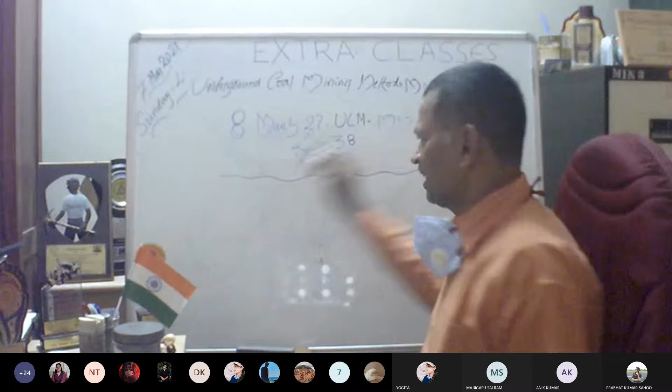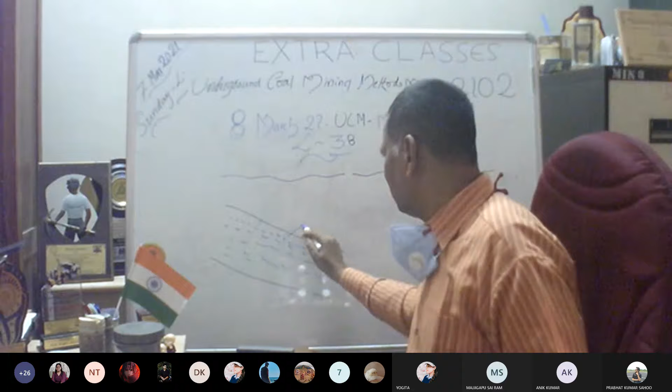2102, 38th lecture. Now, whenever there are thick seams, just consider this is your surface, and then the depth. So if the seam is disposed as a very thick seam, I can extract it in different slices. The slices can be inclined along the dip direction like this, and then this is called... any problem?

Are you able to see the board? No, sir, not exactly. Ajay, you are able to hear my voice? Yes, sir. If you are not able to see the board properly, there is some problem in focusing, I can adjust it. Now let me do that.

Now tell me whether there is improvement in the focus or decreasing. I am rotating in one direction. You say yes if it is increasing clarity. Is it increasing or decreasing? No, sir. So now I am rotating in the opposite direction. Yogita madam, is it improving the clarity on the board, or deteriorating? I am focusing it. Are you able to see better?

Better now? No, sir. No, what is the meaning of no? You should continue to tell me whether the focus is decreasing. Decreasing, right? Now I am rotating in the opposite direction. Now improving? Yes, sir. Very good. Now perfect? You tell me. Yes, sir. Is it okay now? Yes, sir. It is okay? Very good. That's what I want to know.

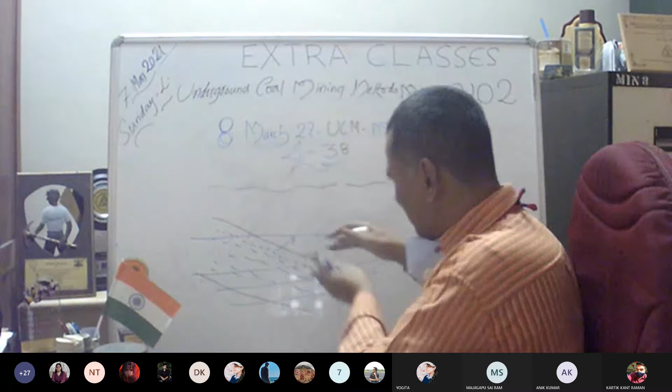Right. And then one more thing is transverse. There are so many ways. Instead of slicing like this, it can be in other fashion. And that is the reason why they have given diagonal, transverse, inclined, horizontal slicing, something like that. So it is very simple to understand. Of course, it is there in the books that I want to explain.

And here, one more thing is when it comes to our special methods of mining, especially for the thick seam or other seams. Already we have seen, I don't want to repeat again, blasting gallery method and wide stall method. Have you understood the wide stall method? Yes, no. Wide stall. So this is slicing.

This can be in different ways, descending, ascending. Other things I will be showing you in the slide and we will discuss. That's what I want to show here. This can be horizontal, inclined, ascending, descending order. And this can be inclined or horizontal, diagonal, transverse. This is the way the terminology is given.

And when it comes to special methods, you have to tell yes or no, then I will continue further. Already the blasting gallery method I have shown with many case studies, photographs, everything. Then we go to wide stall mining, where suppose this is a seam, this is a gallery and this is a pillar. The first thing is, this wide stall method is a partial extraction method, that you should note down.

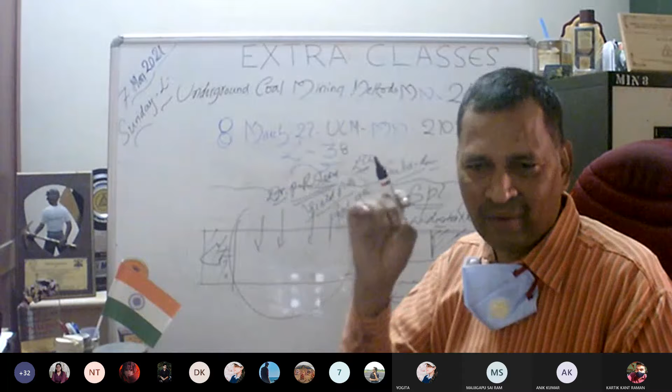Dr. P.R. Sheorey. He has made excellent efforts. He was our former colleague scientist in CMRI, with the yield pillar technique, or goaf pillar method. So these are different. This can be of a chessboard and so many terminologies you can see, right? This was experimented even in some ECL mines. Of course, later, just like our blasting gallery panels, there were some problems and it stopped. But these are the requirements of designing new methods of mining indigenously developed based on our Indian geomining conditions without importing any other technologies.

So this is your Atmanirbhar Bharat or Make in India, Startup, Stand Up India, here in our National Education Policy 2020. So here what is done? We leave a small rib, and its size we will estimate based on what will be the safety factor with some type of rock mechanics analysis. There is modeling and so many approaches for that. Those things we will discuss later.

So I am leaving this in the goaf so that instead of all this falling all of a sudden giving dynamic load, we are trying to provide a goaf pillar or small rib of such a size that it has a safety factor less than 1 or around 1, so that after some time it should yield. That is why it is called goaf pillar or yield pillar method, so that if it is strong, all of a sudden it will not fall, and there is a pillar given in the goaf.

If this is the total goaf area, I am leaving something in between. So before falling, it will not fall all of a sudden; whatever is left out will yield, and this is designed so that its safety factor is around 1 or less than 1. This is the way we decide and design. These are some of the special methods, and another method I have told you about many times is hydraulic mining. You heard about hydraulic mining?

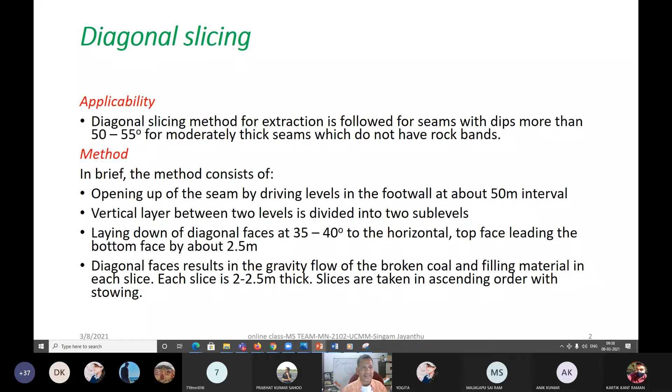Now, diagonal slicing method for extraction - let me tell you, this is more easy, right? With dips more than 50 to 55 degrees for moderately thick seams which do not have rock bands, we used to follow this method, and then the method is simple.

This involves opening of a seam by driving levels in the footwall at about 50 meter interval. The vertical layer between two levels is divided into sub-levels, and then we lay down diagonal faces at 35 to 40 degrees to the horizontal. This is the way it's done.

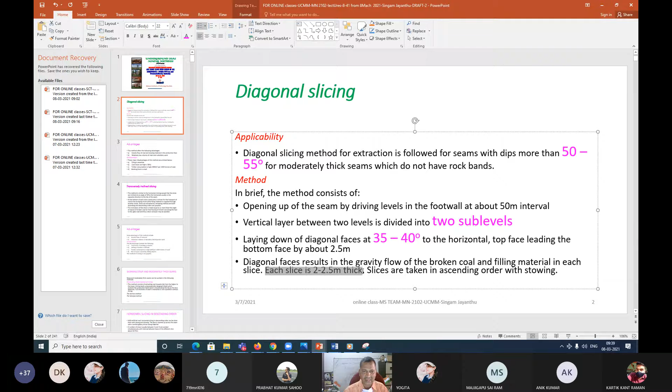Diagonal faces result in gravity flow of the broken coal and filling material in each slice. The slice thickness can be 2 to 2.5 meters - that is what was followed before, that's why it's kept here. We give more importance to recent technology, that's why I want to give only some information about these.

Now slices are taken in ascending order when it is with stowing - you already understand this, I need not explain further. When it is with caving, slices are taken in the descending order.

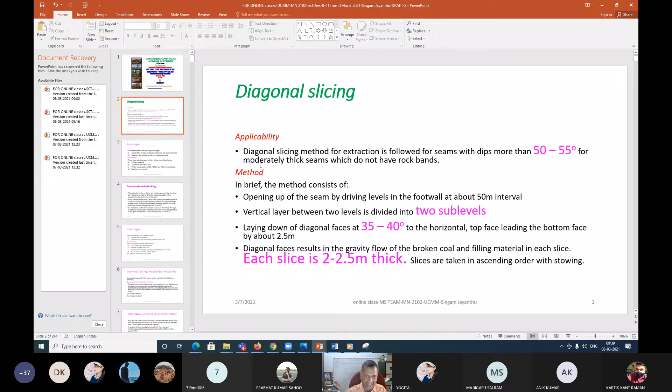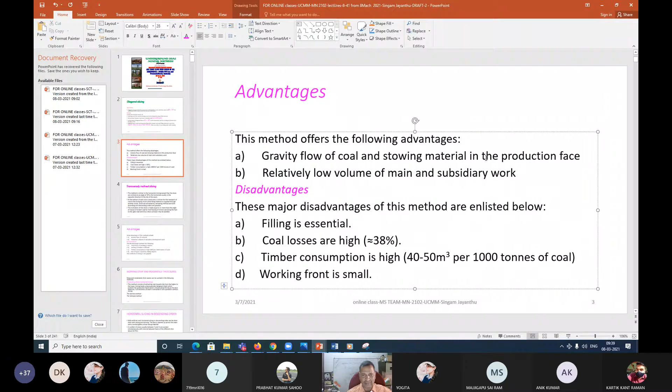Then what are the advantages of this? I'm spending less time on this, my beloved students, because it is easy to understand by anybody. There is gravity flow of coal and stowing material in the production face because it is dipping diagonally, not horizontal. Then there's relatively low volume of main and subsidiary works.

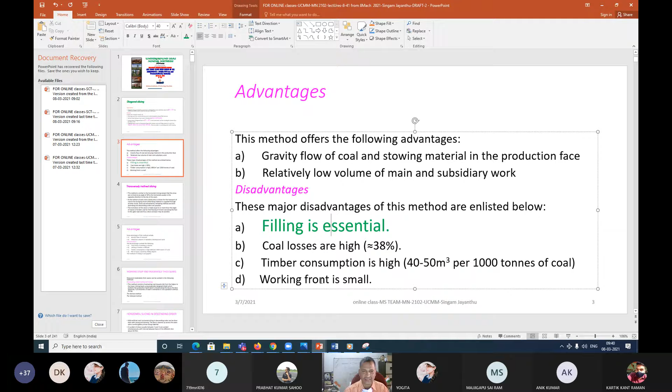The major disadvantages of this method are: filling is essential because we are going with ascending order. Nowadays we don't go with sand, which is scarce material, but some type of pond ash or crushed stone - our Singareni colliery, you may note, uses crushed stone from overburden material for backfilling purposes. Then coal losses are very high, timber consumption is high, and the working front is small based on the face length.

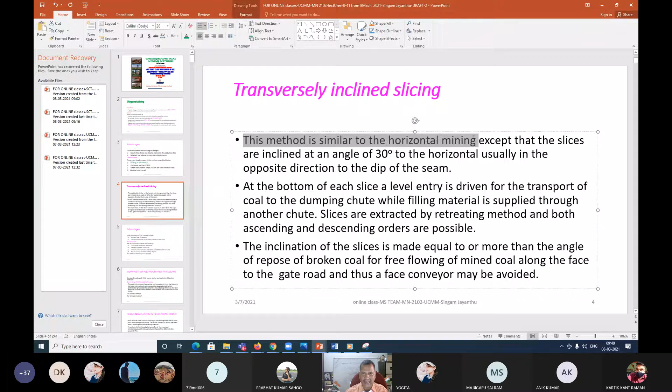Then transversely inclined slicing - now try to understand, this is something like a horizontal slicing, right?

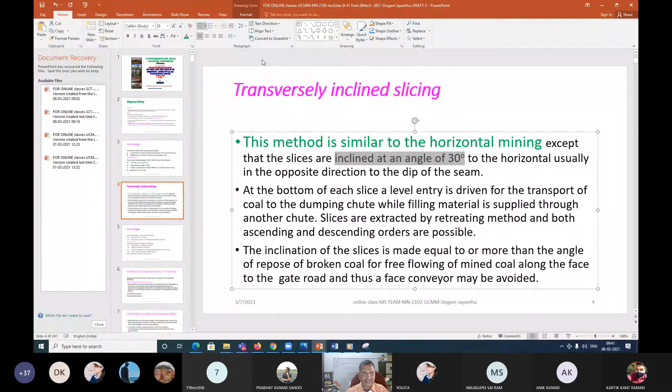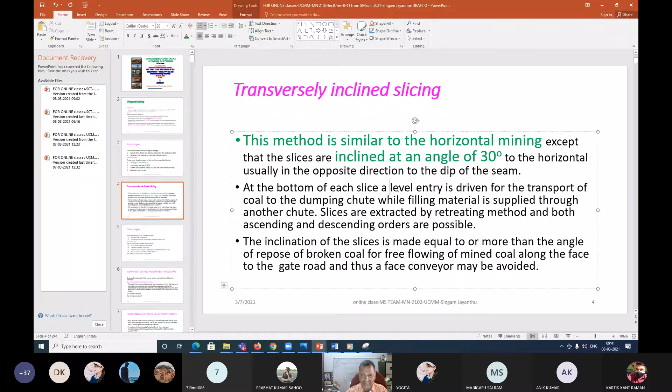Horizontal mining, except the slices are inclined at an angle of around 30 degrees to the horizontal, usually in the opposite direction to the dip of the seam. At the bottom of each slice, a level entry is driven, and for coal transport to the dumping chute, they prepare something like a bunker. That dumping chute is something like a bunker, under which there is an opening through which the coal will fall. That's what a chute means.

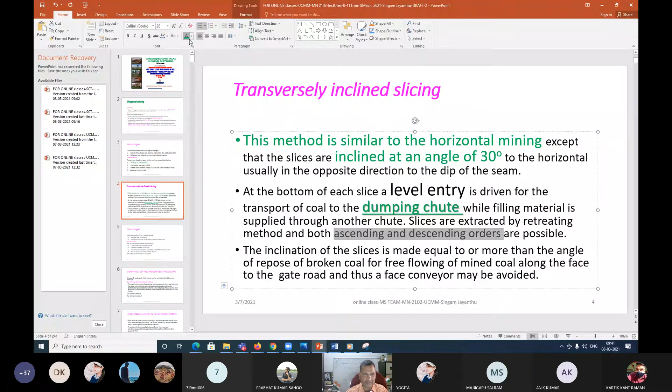While filling material is supplied through another chute, slices are extracted by the retreating method, and both ascending and descending are possible. The inclination of the slice is made equal to or more than the angle of repose of the broken coal. This is a very important point here.

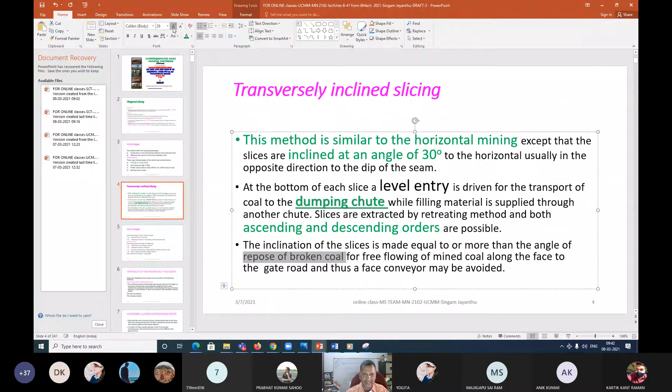Angle of repose, why is it required? Because the material has to pass through when it is sent down, that's the main issue. The main advantage of this is gravity flow of the material. The total front of working is shorter, and setting of timber is difficult - because when you are ascending, there is sand on the floor and you are working over that. So these are some of the issues, plus risk of injury caused by sliding objects.

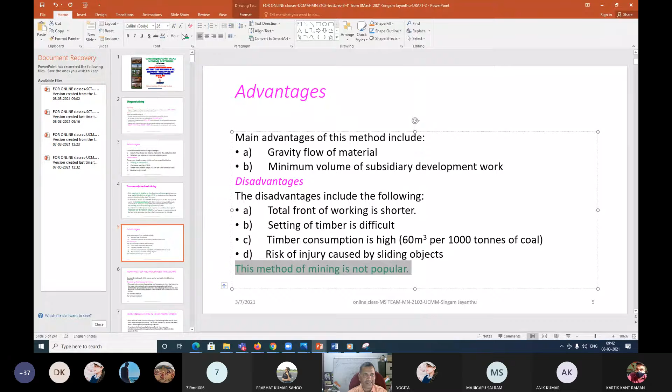That's why I'm not giving much importance to this, since these are not very popular methods, right? That is a very important point. So we go to so many important issues of methods.

Like in our northeastern coal fields, they are very highly inclined and highly disturbed seams. Dr. T.N. Singh Saab has done excellent work at that time in the 1980s, 90s, when we were there. Later, almost very little work was done in designing new methods or importing other technologies. But the descending shield method is one of that.

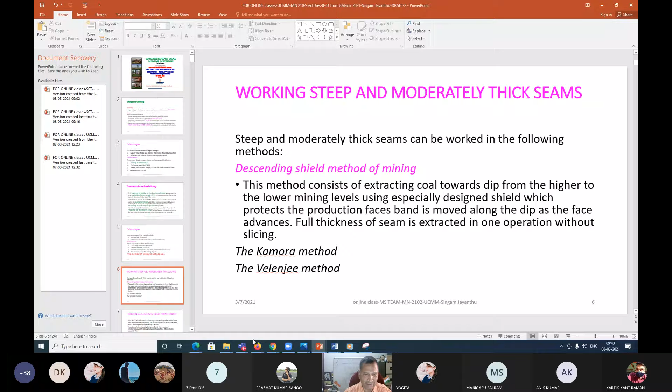Here you try to understand, it's very simple. What happens here is - I am just now coming out of this slide share, so I will draw how it appears. That's more important to understand.

I hope you people are ready with your presentations, whatever are there.

Now I am stopping sharing to explain using the slide share. Now you are able to see this whiteboard, yes?

In this, very simply, this is for highly inclined seams. When it comes to descending shield, you just try to understand. I am showing a section like this - you will be seeing this in so many books, already I have given you those references. So if this is a seam, it is inclined something like this.

Now here, what you are doing - this is something like a descending shield, some type of arrangement where there is cutting. You can cut it or blast these materials. Even your person - this is a shield, there is a cover like this, under which these persons are standing. Before you cut this, you make some connection. It appears something like a metal mine method, but here there is a level along this.

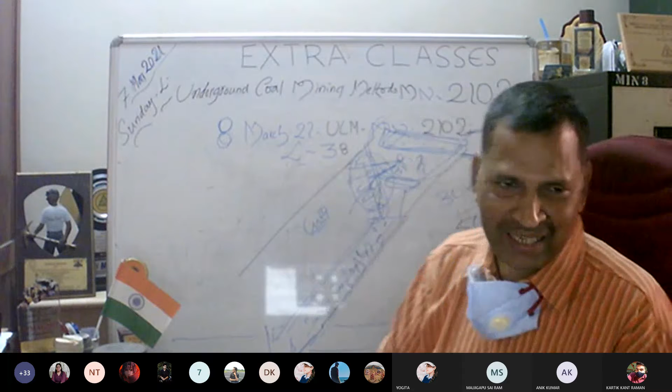This is horizontal horizon mining, also called horizon mining, where you are developing something like a metal mine. The shield descends with persons working under a canopy. That's why it is called the descending shield method. Very simple - when you understand the logic and concept, it becomes easy. If you have any doubts, we'll discuss further.

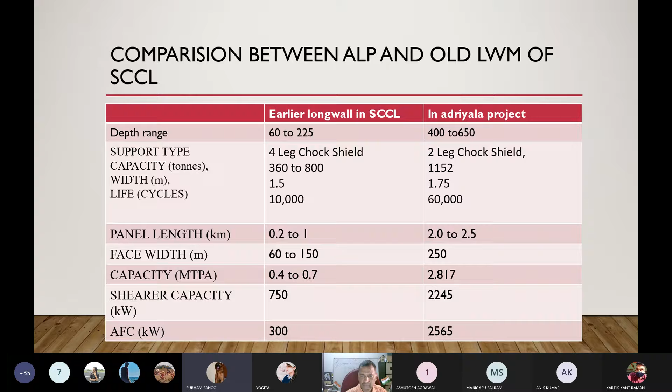So longwall mining is a mining method in which very long rectangular blocks of coal are defined during the development stage of the mine, and then extracted in a single continuous operation by an automated cutting head moving parallel to the coal face. That automated cutting head is known as the shearer. When the coal is cut, the working area is protected by a movable powered roof support system. Sir, these are the hydraulic jacks which support the roof. So the workers at the mine site get a very safe environment compared to other methods of underground coal mining. Next slide, please.

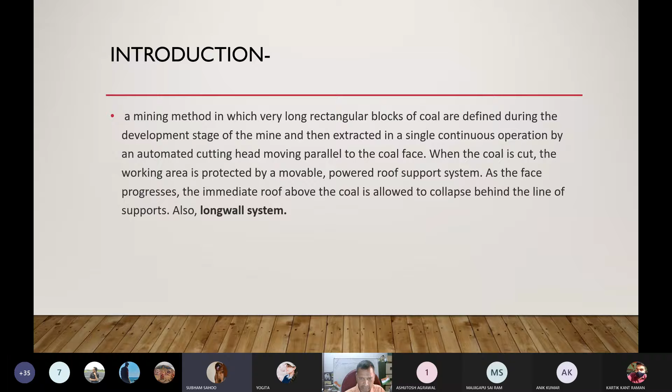So the basic idea of longwall mining was developed in England in the 17th century. Miners undercut the coal along the width of the coal face, removing coal as it fell on the conveyor belt. This was known as the Shropshire method of mining. While the technology has changed considerably, the basic idea remains the same: to remove essentially all the coal from the broad face and allow the roof and overlying rock to collapse into the void behind. Next slide, please.

So at present, due to technology, here are the equipments. A number of hydraulic jacks called powered roof supports. These are the jacks; in the next slide I will show you the picture. These jacks give support to the roof. It holds the roof, and under that the workers with the cutting machine work and extract the coal. These shields are typically 1.75 meter wide and placed in a long line side by side up to 400 meter in length. An individual chock can weigh 30 to 40 tons, extend to a maximum cutting height of up to 6 meter, and have a yield rating of 1000 to 1250 tons each. Next slide, please.

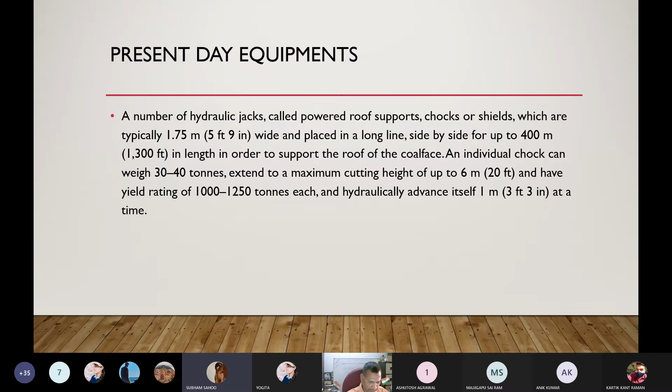Sir, here I have also done a comparison with the room and pillar method. Longwall and room and pillar can both be used for mining, but longwall has better resource recovery, about 80%, compared to about 60% for room and pillar. Next slide, please.

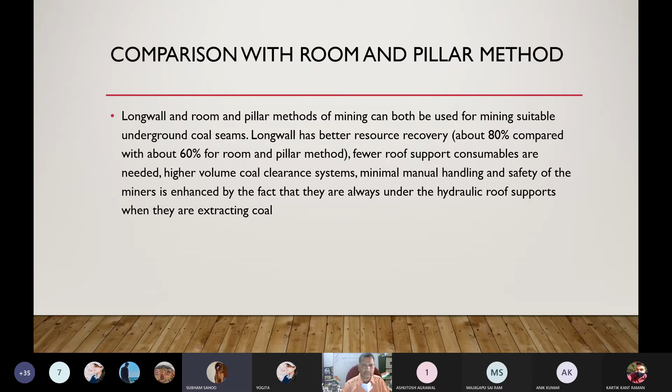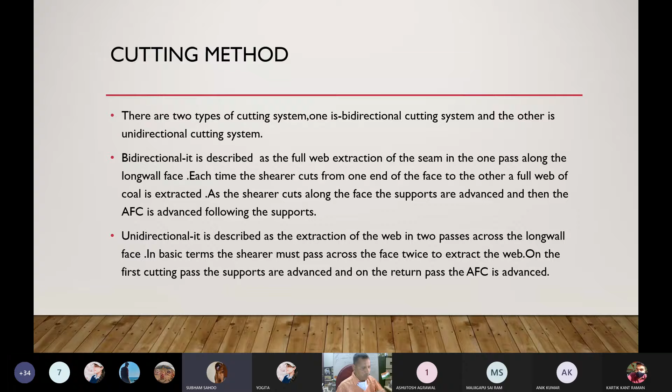So there are mainly two types of cutting system. One is the bidirectional cutting system and the other is the unidirectional cutting system. The bidirectional cutting system is described as full web extraction of the seam in one pass only, while the unidirectional cutting system is described as extraction of the web in two passes across the longwall face. Next slide, please.

So here, casually, I can say the overview of this method is: in this method, generally a relatively long mining face is there, which is up to 100 to 300 meters long. So the shearer will cut the coal, okay, and the conveyor belt will drive it away out of the site.

Once the longwall face equipment has been installed, coal can be extracted along the full length of the face in slices. Means slice by slice, we will move forward and cut the coal face. This process is repeated continuously, thus completely removing a rectangular block of coal, the length of the block depending on a number of factors. Next slide, please.

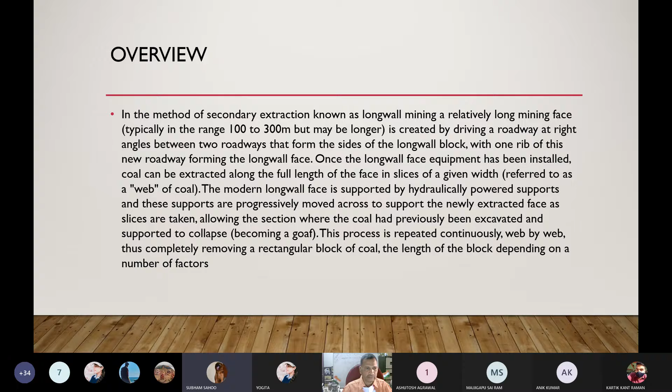Longwall mining actually is done in two procedures. One is advancing and another is retreating. In the advancing method, the start point is very close to the main. Go to the figures. If you have any figures, go to that. Within 1 minute, you have to finish. Go to figures. Leave the text. Okay, sir. Go to figures if you have any.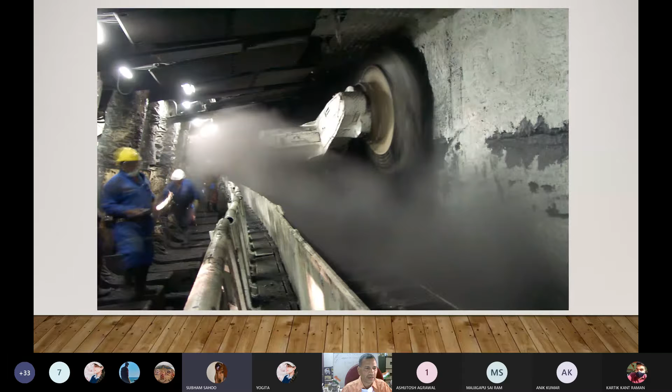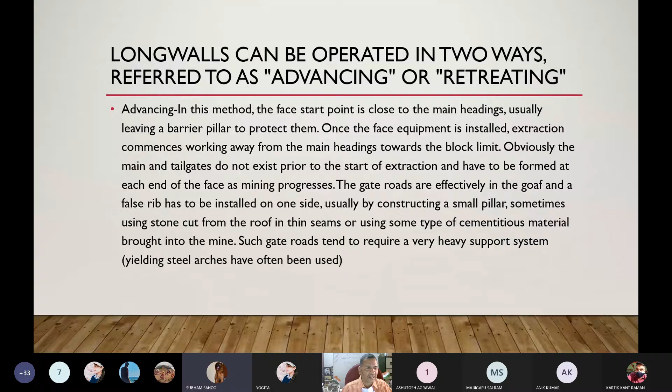Sir, in the second slide. Go to the third. Not these two figures. Four. If you are explaining the fourth method, you should show the figure of that. Otherwise, there is no point in showing this. Fourth slide. Now you conclude. Conclude. And others should say what are the blunders made in this, what improvements can be done. Others should tell now. And now you conclude.

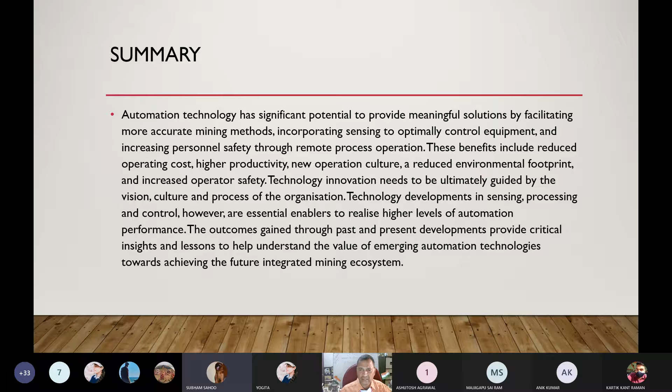So definitely we need to develop our technology, and the best solution of this is the longwall mining method only, as it gives 80% efficiency and better safety results to the workers of the mining sites. Longwall mining is the future of underground coal mining in India. Thank you. Now others should say if any questions to him.

I hope at least after this many presentations and this much time, this almost last week, you must have understood the logic and the essence of this. The question is what mistakes were made by him and how to improve it.

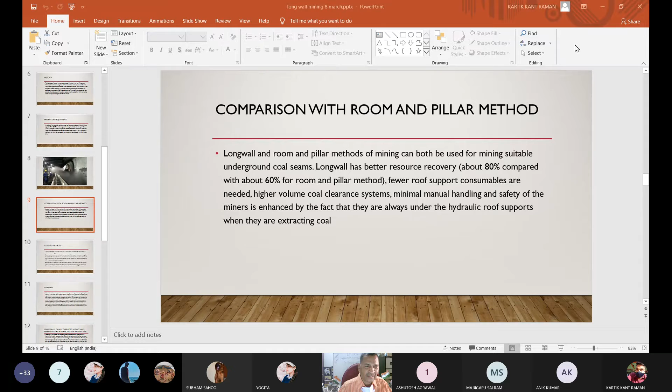Already I told you, I don't know to you people or not. It is something like somebody is eating chicken, you are taking it from his mouth or from his stomach and eating it yourself. If you are copying and pasting anybody's, even a sentence, it is such an unethical situation. That habit should go. That is a very bad habit, and we want to encourage good habits of writing on your own, preparing on your own, not copying from somebody else. That is the reason why these assignments are given to you, my beloved students. You understood that. And now let us go to the next.

Thank you, sir. Nigam is going to be presenting next. Good morning, sir. Sir, I would like Karthik to share the slides on my behalf. Organize yourself. Who is presenting and what is your topic? You continue. Till it is shared, you continue to say about it. What is the topic? Bonjour, everyone. My topic is special coal mining methods, and I am Nigam Mohanty from the Department of Mining, roll number 119MN0774.

Sir, about the topic, this project talks about various special underground coal mining methods, which will be discussed one by one, from board and pillar to drift mining. The entire presentation is according to the publication format of international journals. For the reference part, I have taken ideas from various websites, government-run websites like MCL, BCCL, and private websites such as undergroundcoal.com, britannica.com, and researchgate.com. Moving on to the acknowledgement part, Karthik, please.

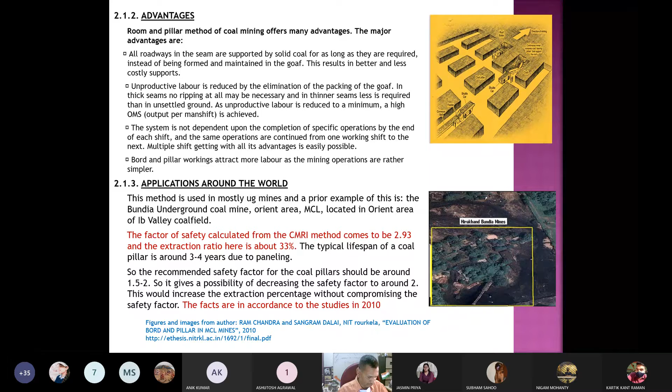Hello, Karthik, to the next.

As you can see, longwall mining is nothing but a simple manner where large blocks of coal, usually 100 to 200 or 300 meters wide and 1 kilometer to 3 kilometers long, are extracted by using continuous miners or various other applications, cutting through them into slices of 0.6 to 1.2 meters. Since it is an advancing longwall mining method, the development takes place only 30 to 40 meters ahead of the mining block.

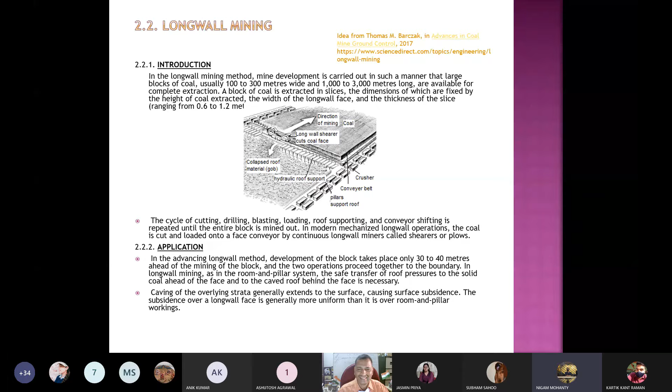In the next slide, I have noted down various advantages and disadvantages of longwall mining. As you can see, low operating cost, high productivity, high recovery, low dilution, and high production rate are several of its advantages. And some of its disadvantages are high capital investment, as you can guess yourself that continuous miners and various other sophisticated instruments require a high capital investment, and high development charges.

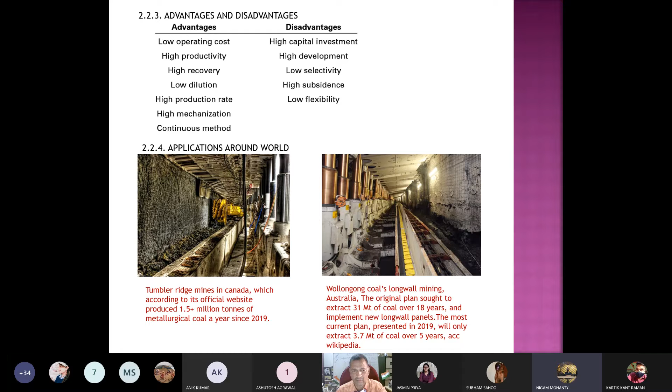Its applications around the world would be Tumbler Ridge Mines in Canada, which, according to its official site, has produced around 1.5 plus million tons of metallurgical coal a year since 2019. It is huge. Then Wollongong Coal's longwall mining in Australia. The original plan sought to extract 31 million tons of coal over 18 years. But since the extraction has been done over a very long period, the resources are limited right now, and the extraction is reduced to 3.7 million tons of coal over 5 years.

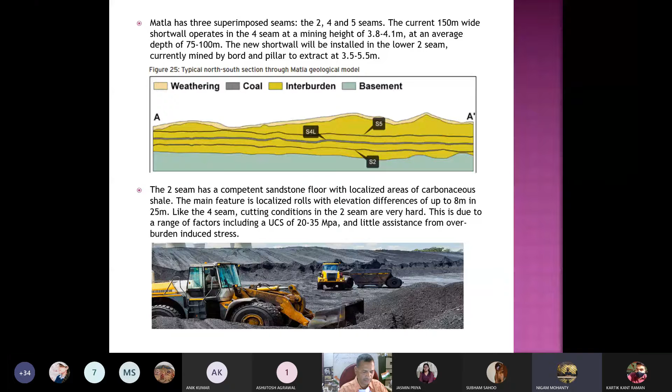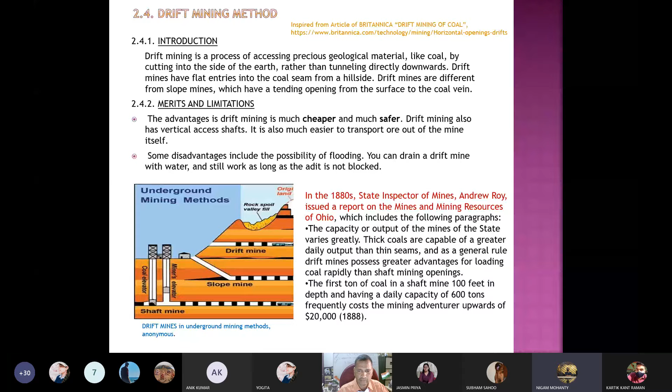To the next slide, that is the slope mining method. As you can see from the previous figure and from this figure, slope mining is something in which you drive into the coal to extract it at a slope, not directly vertical as in shaft sinking, or like drift mining. Here, the basic application is when the coal seam does not outcrop, but it is not far below the surface of the earth. It can be extracted by using this method. But since these slope mines require a huge amount of work and it is a very slow process, it is used very little these days. The last example that we saw is the slope mines in Warner Coal Mines, Alaska, which is owned by Isidore Newman and Son.

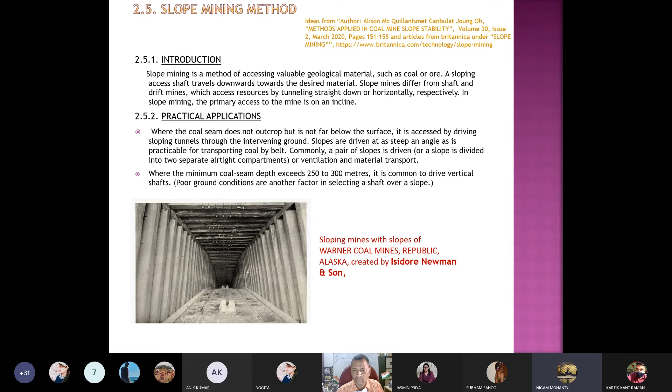To the next slide. As you know, a journal without a case study is like a car without its tires. My first case study will be about the multi-slice longwall mining of Barapukuria coal mine in Bangladesh. From the figure itself, you can see that the Barapukuria coal mine of Bangladesh has 6 thick seams.

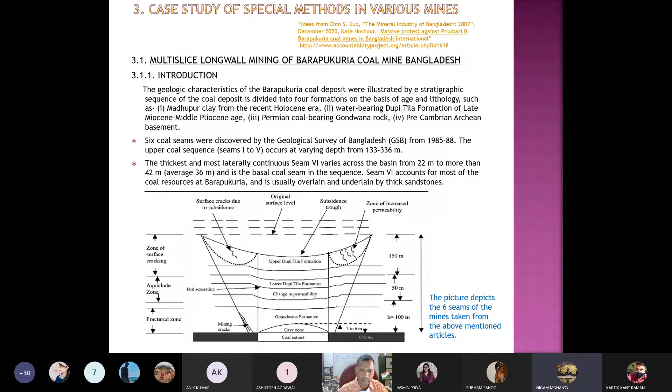The mining method used here, as we know, depends heavily upon the depth of the strata, the horizontal to vertical stress ratio, and various conditions and thickness of the coal seams. So the company operating at Barapukuria coal mine implemented a longwall mining method with a limited extent. As a consequence, the China National Machinery Import and Export Corporation (CMC) designed an underground multi-slice longwall layout with a descending slice. The figure below, sorry, the figure is not that clear, shows the difference between descending multi-slice and ascending multi-slice. In Barapukuria coal mine, we are using descending multi-slice.

About 16 panels were selected for the first slice, where each panel's length and width was about 120 and 520 meter respectively. Following the extraction of a panel with 3-meter height, about 0.8 meter of subsidence occurred in the mining area. The mining of the first slice was ended by early March 2012. The second slice, as you can see from the figure, started from March 16 of 2012.

Below are the various facts and figures about Barapukuria coal mining, which is represented by a parent company, Petrobangla, and produces a yearly output of 0.8 million tons, which is huge enough for a developing country like Bangladesh. The coal type is bituminous.

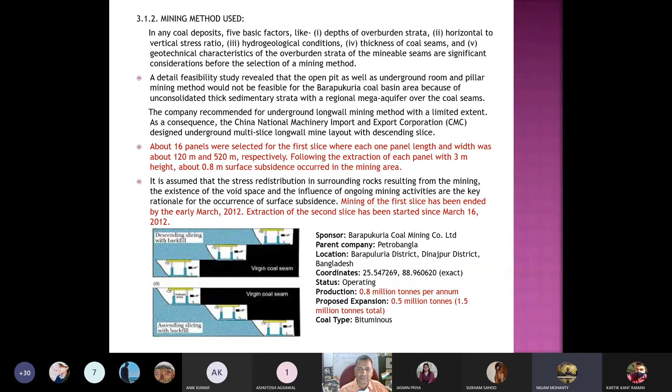This is the case study about the Velenje mining method of Velenje mines. The Velenje mines, as we must have come across at one time, is the largest Slovenian coal mine deposit and is one of the thickest known coal layers in the entire world. The Velenje mines was the backbone of European civilization and served for 137 years of operation. And more than 225 million tons of lignite coal has been extracted from it.

To describe more about the Velenje method, the Velenje method is actually a result of various years of work of numerous mining method experts. The mining method is being developed and improved till now. The Velenje mining method is internationally protected by patents, which proves that it is the most efficient method of extracting thick coal seams. The specialty of the Velenje mining method is pouring over roof supports into longwall chain conveyors, which provides very high production capacity with an extremely high level of safety and great economy.

The Velenje mining method divides its coal into the footline section and the hanging wall section. The footline section is 5 meter high and secured by a hydraulic support system, which allows mechanized exploitation by using excavation machines. Its production is around 3.5 million tons of coal per year, which is very, very high.

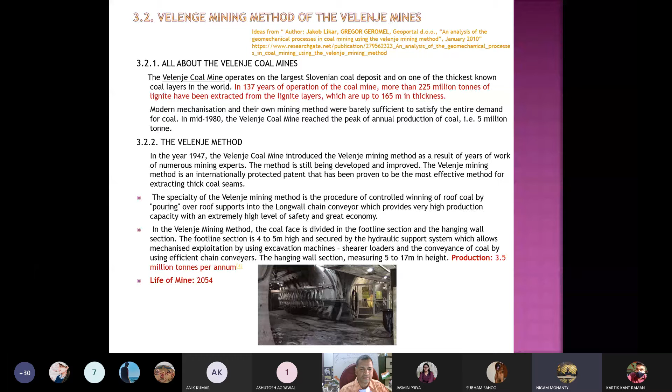Unfortunately, photos of the Velenje mining method weren't available, and it required authentication. So I just pasted a photo that shows how specialized and mechanized this Velenje method of coal mining is. The life of this mine is estimated to run to around 2054 to 2055.

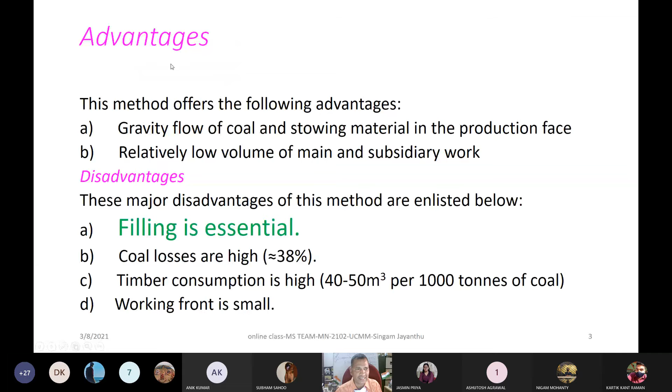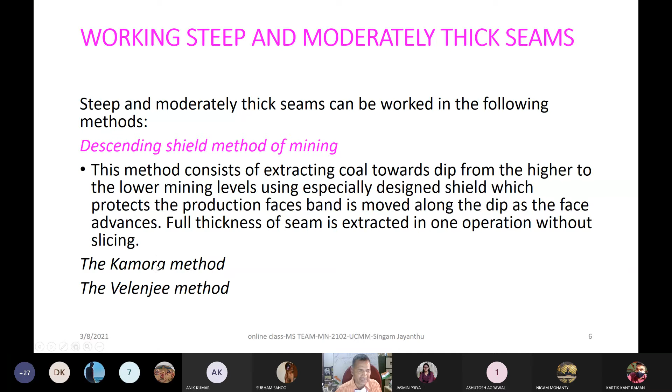Shall I summarize? Okay. So today what we tried is to know about the steep or thick seam mining methods, about diagonal slicing, transversely advanced and other things. Of course, we will discuss later. Descending shield also, in which Velenje and other things come. Some other names are given in different countries. A few things Nigam also tried to say.

Today Ashutosh on transportation could not present because of the display problem. Then Subham presented on longwall; he was supposed to finish by 9:48. Questions should be prepared point-wise, references given in the table, the introduction should be in the beginning, not in between, and instead of material already discussed in the regular class, you should highlight only additional materials. The FPS system need not be followed; we continue only the MKS system. I said what mistakes there were.

Then Nigam tried, and in fact, the Barapukuria engineers were all with us in NIT Rourkela. We gave training 10 years back; he has given a 2013 reference. Before that, we trained them with the Chinese system. In 3 batches, we trained all the mechanical and other engineers in NIT Rourkela itself on mining methods. Sir, in Orient Mines also your name was mentioned. That's okay. Nigam tried to collect good information on various special methods; you should have concentrated on this rather than general information.